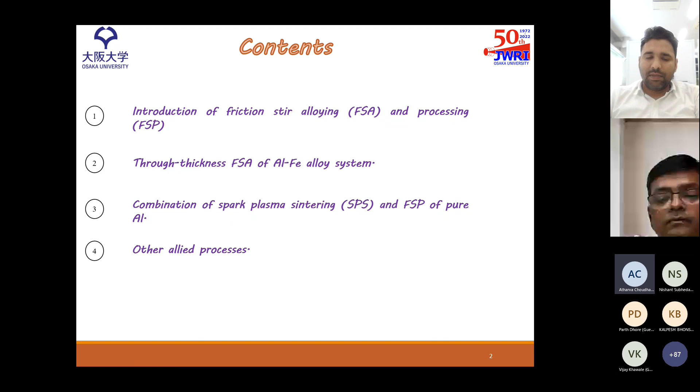Lastly, I will discuss some other allied processes related to friction stir welding. Many processes have emerged recently based on its principles. Friction stir welding is the initial one, mainly used for butt welding and lap configurations, as well as underwater welding and spot welding. It is primarily used for aluminum alloys, with applications in the aircraft industry, bullet trains, and high-speed vehicles.

Another variant is alloying, where local modification is carried out by reinforcing other elements into the base metal. One such variant is processing, where instead of another metal, reinforcements like silicon carbide or graphite are added to the base material to enhance surface properties.

The most important recent development is additive manufacturing, where layer-by-layer deposition takes place to construct a product in a 3D model. Other variants include cladding, where another metal is joined over the base metal to provide resistance from corrosion or wear, and channeling, where a channel is created through solid state welding; extrusion and brazing are also similar processes.

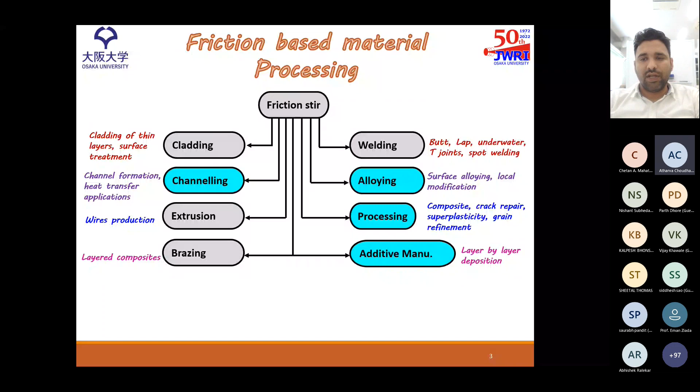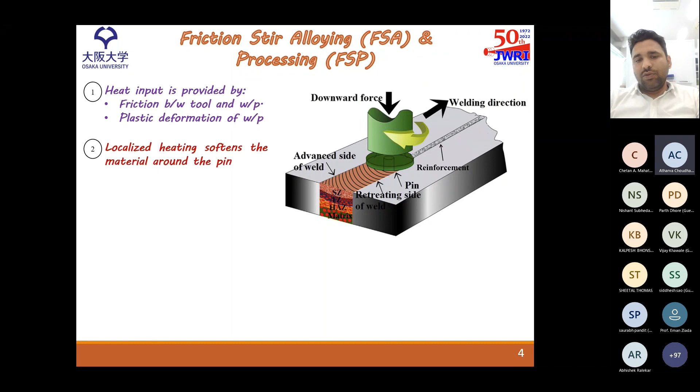Coming to my first topic, the introduction: what is friction stir alloying and processing? This is a solid state process, one of the important variants of friction stir welding. It consists of a base material in which we create a groove, and the reinforcement is filled in this groove. There is a non-consumable tool which has two types of motion, linear and rotatory, and the tool moves in close contact with the surface.

The frictional heat is generated by the frictional interaction between the tool shoulder and the base material, as well as the plastic deformation carried out in the solid state. This is responsible for the heat generation.

And in this way, the localized heating is generated, which softens the material around the tool pin, and this rotatory motion makes the material flow. And in this way, this reinforcement material, whichever is in the groove, gets filled and mixes with the base material. And in this way, the alloy or composite based on the reinforcement is produced in the solid state.

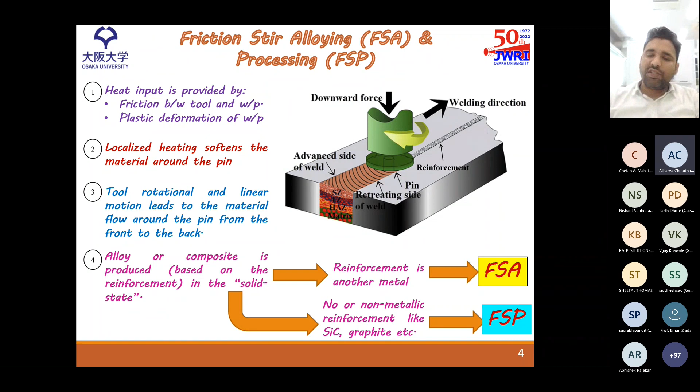Now, based on the reinforcement, if the reinforcement is another metal, suppose the base metal is aluminum and the reinforcement is copper or iron or magnesium, anything, then we can say this process is alloying, that is friction stir alloying. If there is another reinforcement which is non-metallic, like silicon carbide, graphite, tungsten boride or tungsten carbide, etc., then the process is usually termed friction stir processing. However, the basic principle of both processes is the same.

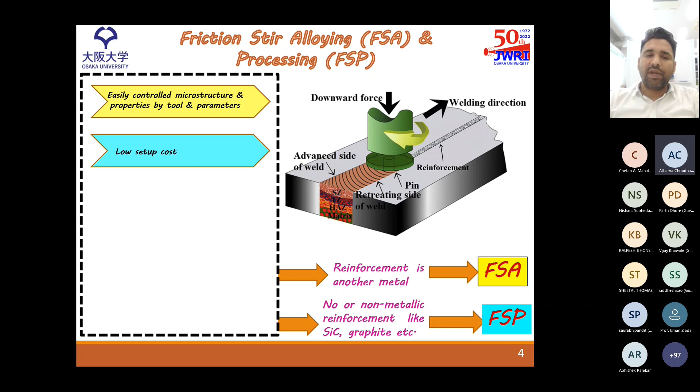Now, why are we conducting this processing in a solid state when we can do it in casting? Because of certain advantages of this process: the microstructure can be easily controlled, and whatever we are producing, we are producing it in a solid state, so the material properties remain intact. The overall material setup cost is very low. It can be done on a milling machine, and the particle impregnation depth can be easily controlled by the tool pin.

This is a tool and it has a pin which is inserted into the base material. So by controlling the pin depth or the pin height, we can easily control the depth of particle impregnation. The process is green and energy efficient as it does not involve any slurry, shielding gases, fumes, etc. And this is a one-step solid-state processing for microstructural refinement.

The grains obtained after friction stir processing are very fine. And densification is good - there are no defects like porosity or gas shrinkage or anything. And the particle dispersion is mostly homogeneous across the thickness, across the shoulder or the processing zone.

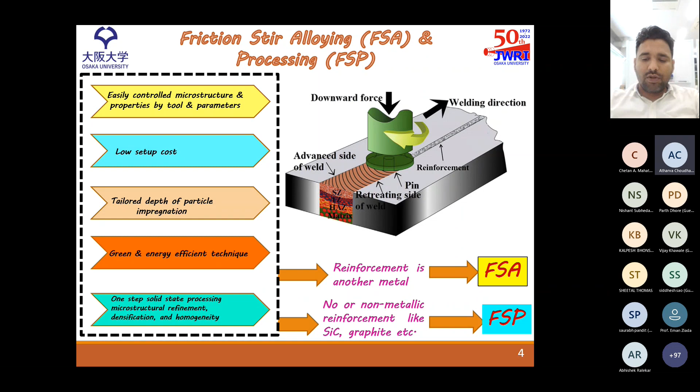Now coming to the first project that I'm working on here, that is the through-thickness inhomogeneity in the friction stir alloy Al-Fe alloy system. Now after thinking of the title, the question arises why Al-Fe alloy system? Because in the Al-Fe alloy system, when fabricated by friction stir alloying, there is generation of plastic strain and exothermic reactions. These exothermic reactions and plastic strain lead to the formation of Al13Fe4 intermetallic layers. This intermetallic layer, when reinforced in the aluminum, increases the tensile strength, improves the hardness, as well as improves the corrosion resistance.

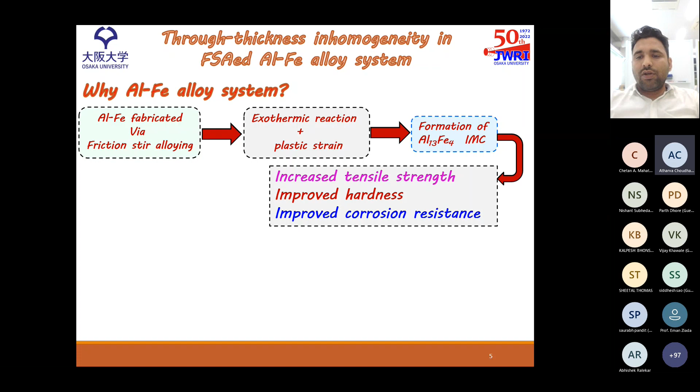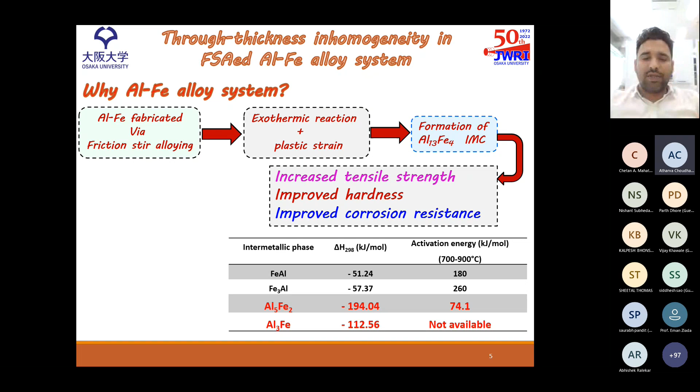These are the aluminum-rich intermetallic compounds, and they enhance the properties. They are hard, brittle substances which are impregnating into the aluminum surface. So it is increasing the hardness, tensile strength, etc.

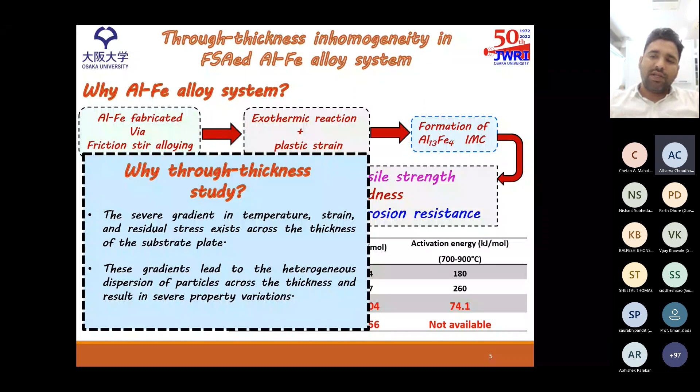Now the next question: why through thickness, and what does it mean? Through thickness means that when in friction stir welding we are doing the shoulder, the heat generation is not homogeneous. On the top of the surface where the shoulder is interacting with the base plate, the maximum heat is generated. And when we move across the thickness, the heat generation changes, the temperature varies, and similarly the strain and the residual stresses vary.

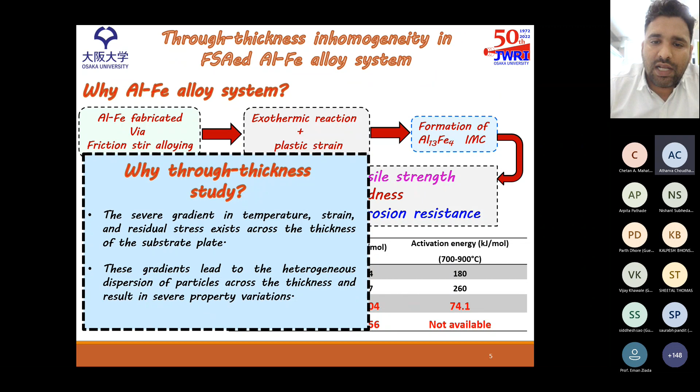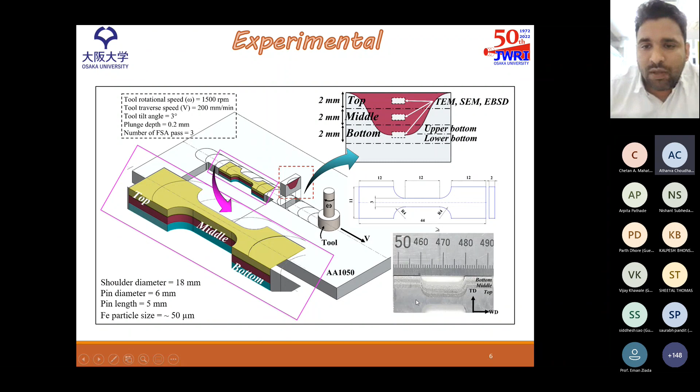Now coming to the particle dispersion microstructure, this is the cross-section micrograph. This black part can be identified as the iron-rich zone, and this is a fully etched micrograph. So a very well stir zone and other zones can be classified.

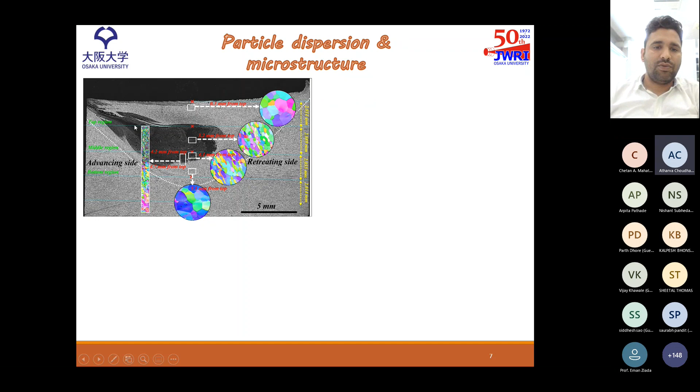Now the two interesting features observed here are that this is the advancing side and this is the retreating side. The particles are mostly dispersed on the advancing side instead of the retreating side. This happens only in the top layer, because in the top layer a shear zone is formed around the pin. This shear zone is very dominant in the top section, which throws out the particles from the stir zone to the advancing side.

Now why only advancing side, not the retreating side? Because the material movement is from the retreating side to the advancing side at the tool rear, which causes the dominant dispersion on the advancing side as compared to the retreating side. Whereas in the middle and bottom layer, this shear zone is much less dominant, and it does not significantly affect the particle dispersion, so the particles remain mostly in the stir zone only.

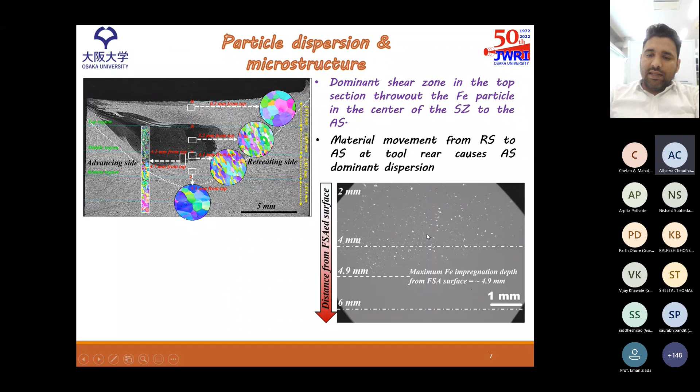In the bottom region, as I said, there's a bimodal distribution. We can see that in the upper bottom section some particles can be seen, whereas in the lower bottom section there is no particle. So this means this is the iron deficient region and this is the iron rich region.

Interestingly, we have observed that the particles can be impregnated up to 4.9 millimeter depth, the last particle being impregnated at 4.9 millimeter. Luckily we also have a pin length of around 5 millimeters. So we can see the first benefit, that the particle impregnation depth can be controlled by the pin height, which is achieved here, and the particles are impregnated only up to the pin height. There's a homogeneous dispersion in the middle and a bimodal distribution in the bottom section, as explained earlier.

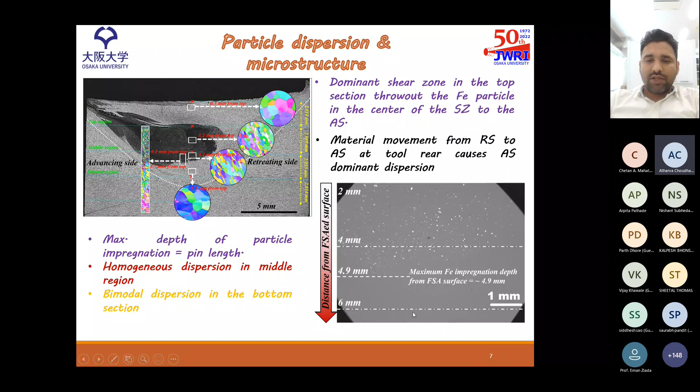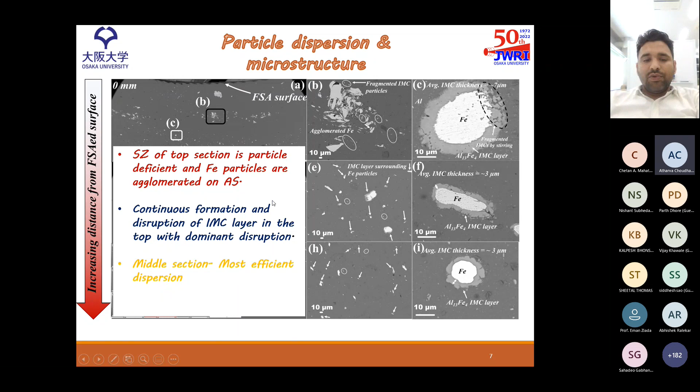There is continuous disruption and formation because in the top section, the temperature is also higher for diffusion of iron atoms into aluminum, so the reaction is also higher. So the chances of formation of IMC are more prevalent in the top section, but simultaneously the stirring action is also more dominant, causing disruption of this layer. The middle section shows the most efficient dispersion we have observed.

Coming to high magnification transmission electron microscopy, we obtained a sample from the stir zone. As already said, the top section's stir zone is a particle deficient region, so there's no iron for diffusion or reaction with aluminum. That's why we observed only very few particles of the IMC layer here, a well-defined elliptical shaped IMC Al13Fe4 particle. On SAD indexing we confirmed this particle as the IMC particle, and the EDS analysis further confirms it.

The middle section of the Al-Fe alloy shows very interesting features. First, there's a homogeneous dispersion of particles as seen in the EDS mapping. Also, two types of IMC particles can be observed: the first is the elliptical shaped particle, and the other is the irregular shaped particle. Now why do we observe these two types of morphology when the reaction is one?

By TEM analysis we identified that the elliptical shaped particles are precipitated out of the matrix, whereas the irregular shaped ones are fragmented particles from the layers formed around the Fe particle. That's why these two types of morphologies are visualized.

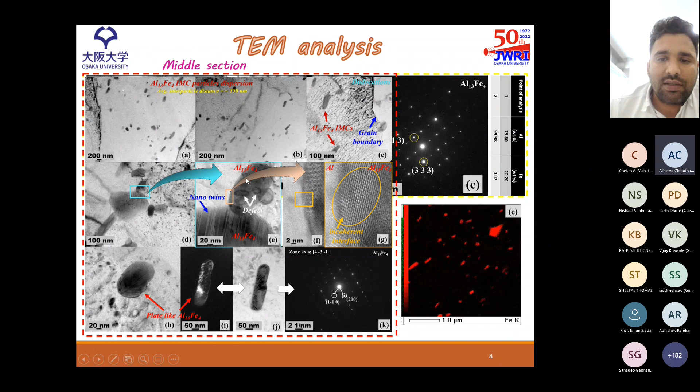Another interesting feature is the incoherent interface, as can be seen here. This incoherent interface further restricts dislocation movement as it has higher energy - these are high energy interfaces. Based on these features, we can say that strengthening is provided in multiple ways by the IMC particles in the aluminum matrix.

So here I have discussed the uniform dispersion of IMC particles, the incoherent interface, the nano twins which are formed, and the defect structures on IMC particles. We observed these small shapes with hole morphology, which appear to be defects. But when we did high magnification microscope analysis, we can say these are not holes but instead cavities - when there is localized melting of aluminum, this aluminum deposits in these cavities and then solidifies. So these are aluminum rich zones instead of hole defects in the IMC particles.

Now, as I said, these small size IMC particles contribute to grain boundary pinning, as can be seen here and also here. The grain boundary pinning and dislocation blockade can also be visualized here. The PSN mechanism by unreacted Fe particles is also visualized in some of the cases.

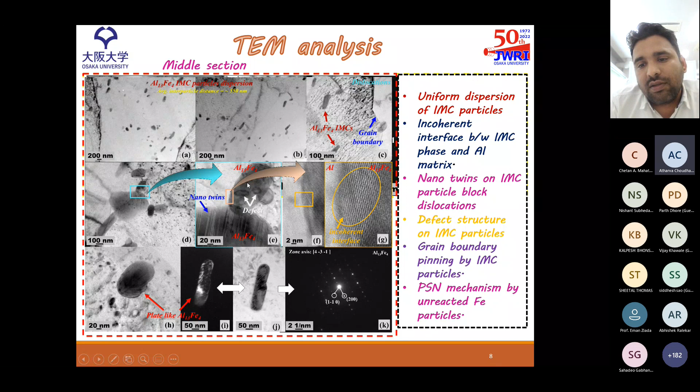Now, from the bottom section of the Al-Fe alloy, the heat available for diffusion of iron atoms and aluminum is very significantly low, and there are no such reactions. However, there is reaction, but it is much less dominant compared to the top and middle sections. So we found unreacted Fe particles here, and this is confirmed - these particles are SAD confirmed unreacted Fe particles.

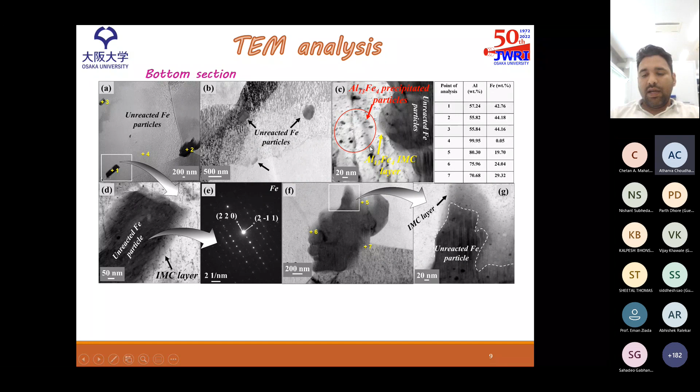However, we have observed a layer also - this is a diffusion layer or IMC layer formed around the Fe particles. But this layer has such high thickness because in the bottom part the stirring action is also very less, so it's not broken or fragmented and remains intact with the particle. Here we can see some IMC particles which are precipitated and formed in the matrix, and here also two types of morphology are obtained: the irregular one and the ellipse-shaped morphology.

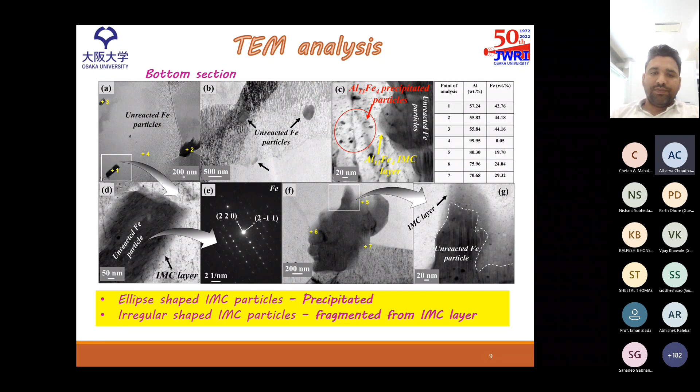Now coming to the microstructural evolution, this is the microstructure of the base material. We can see elongated grains, which is a typical rolled structure. And this is the microstructure of the top region.

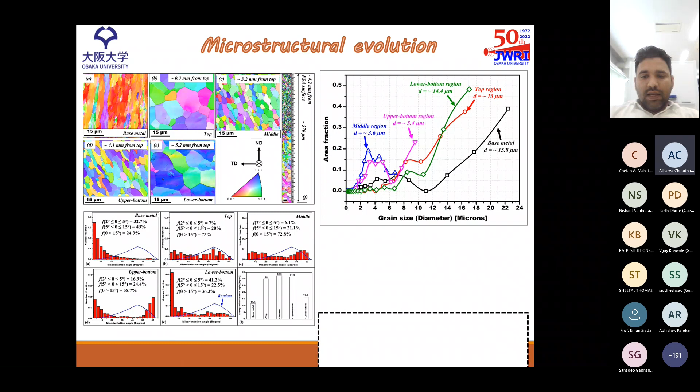Coming to the tensile properties, we can see that the middle section has the highest tensile strength as compared to the bottom and the top one. The bottom section has the highest elongation.

This is because of the bimodal distribution; the fine grain size provides the strength, whereas the large grain size helps in dislocation accumulation and thereby provides higher elongation compared to the other one. Also, in the stir zone, since the particle dispersion is homogeneous as we have seen, higher and homogeneous hardness is obtained.

Whereas in the advancing side, the top section, the particles are dominant on the advancing side. That's why the higher hardness on the advancing side is obtained.

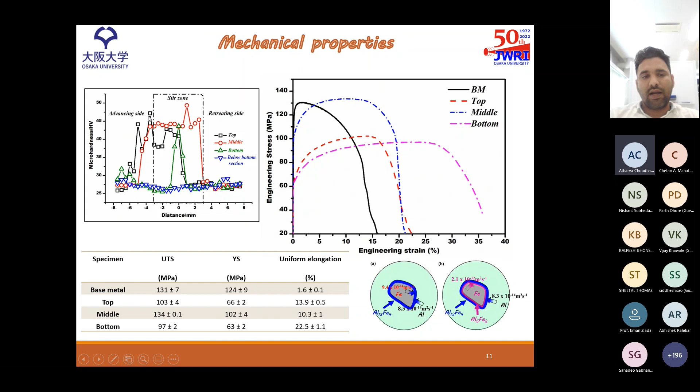Now coming to the reaction. This is an Fe particle and this is aluminum. So what happens, due to the diffusion of iron and aluminum, an Al13Fe4 layer is formed here.

Since these are the rates of diffusion of iron and aluminum in the Al13Fe4 IMC layer, there will be a unidirectional diffusion of iron atoms into this layer, and the content of Fe keeps on increasing. So this provides the foundation for the reaction of Al5Fe2.

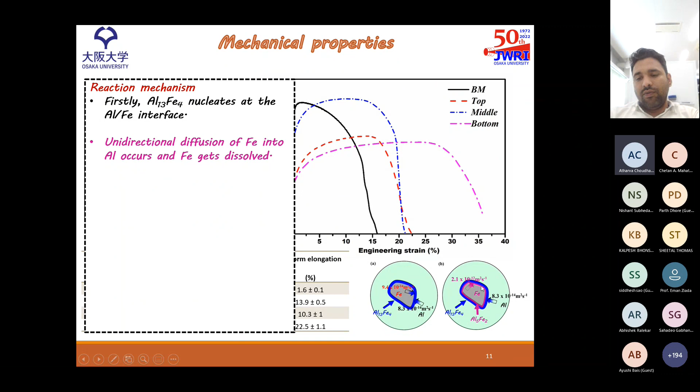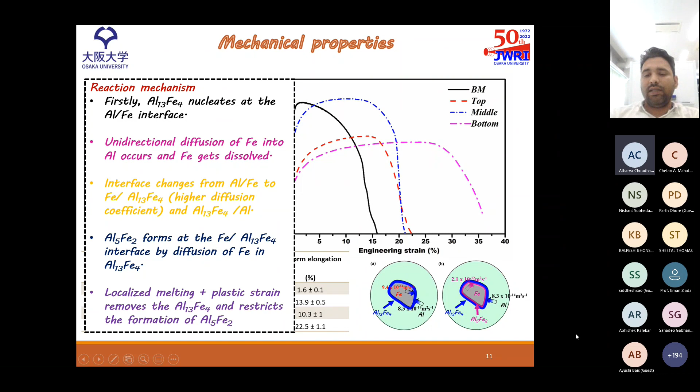However, in our case, as soon as this layer is formed, Al13Fe4, by the stirring action, it is removed from the Fe particle, and that's why there is no foundation for the formation of Al5Fe2. Thus, we have avoided this brittle intermetallic particle from our structure.

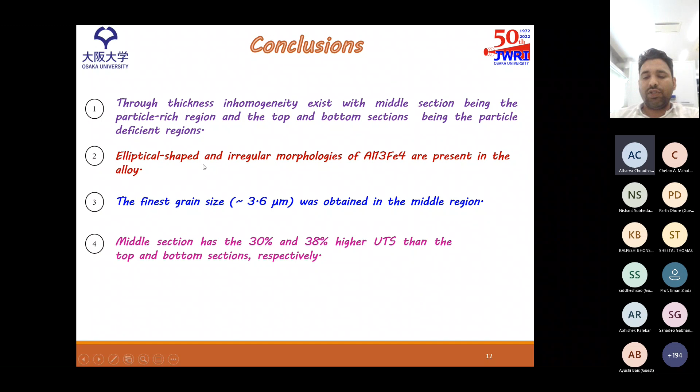Coming to the conclusion of this part of the presentation, we have obtained through-thickness inhomogeneity in the middle section, and the middle section is the best section, having the highest strength. Two types of morphologies are found, elliptical shaped and irregular morphology, and the finest grain size was obtained in the middle region.

Now coming to the second part of the presentation, this is my second project, where we have combined spark plasma sintering and friction stir processing. Why are we combining these two advanced manufacturing strategies?

The reason is that spark plasma sintering, when the powdered billet is formed with SPS, has some porosity. However, it is 95% dense, but still there are 5 to 10% chances of porosity. This porosity reduces the density of the component and the hardness as well as the tensile strength.

Another problem with spark plasma sintering is that the grain size is very high because of the long exposure to higher temperature. So the grain size is very high, and due to this higher grain size, the tensile strength is further reduced.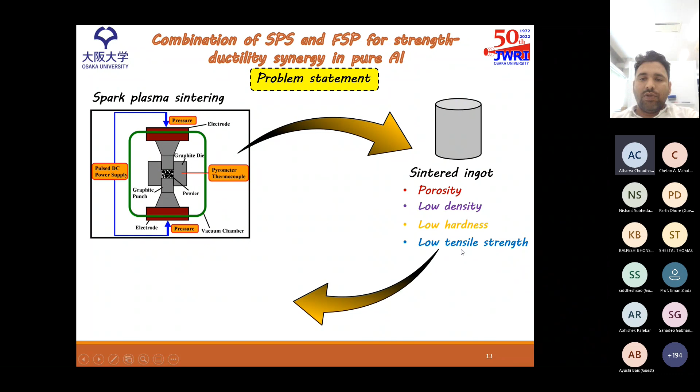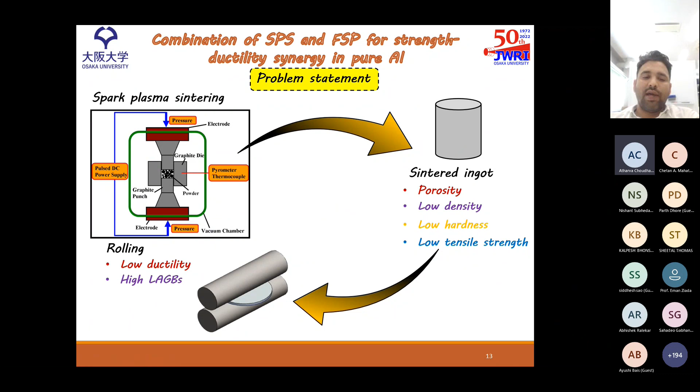So the most prevalent solution is to subject these powder metallurgy components to some kind of severe plastic deformation process like rolling or extrusion. With rolling, the density becomes 100%, but again the ductility is reduced, and the microstructure consists of a high fraction of low angle grain boundaries, so the ductility is severely compromised.

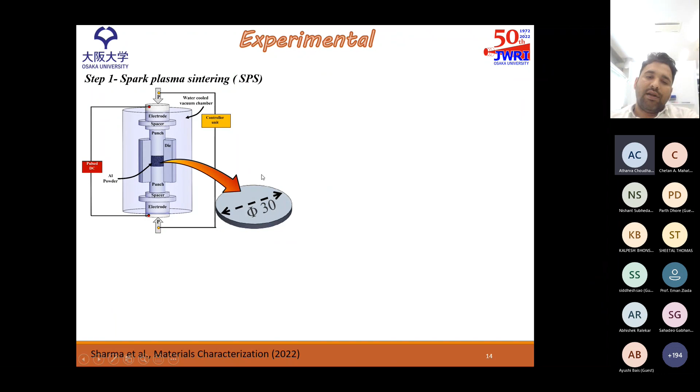So we came up with a solution to combine spark plasma sintering with friction stir processing for it. In the first step we have done the spark plasma sintering, and we obtained a powder billet with a 30 millimeter diameter and 5 millimeter thickness.

And these are the process parameters we have used. The most important parameters are like the temperature, which is around 550 degrees centigrade, and sintering time, which is around 20 minutes. And we have produced this billet.

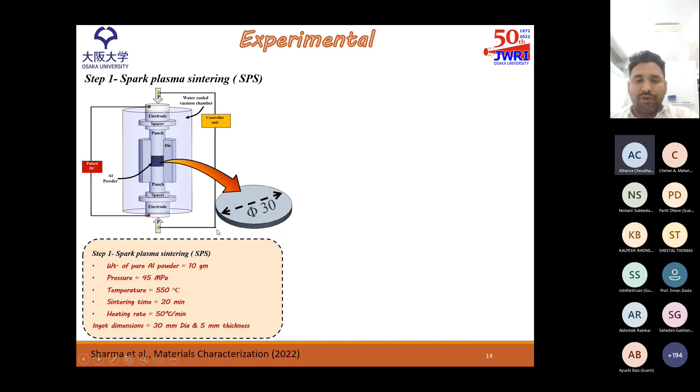In the second step, we have done the cross rolling. What is cross rolling? It means the specimen is rotated by 90 degrees after each pass.

In the first pass we obtained a billet of dimension around 32 millimeter on the minor axis and 55 millimeter on the major axis. In the second pass it is rotated and again passed through the rolls, and we obtained around 40 millimeter diameter and 2.5 millimeter thickness. So it is a 25% reduction in each pass.

Now the primary reason for doing the cross rolling is because we have to fix it on an FSP/FSW setup, and fixing is difficult with the machine available here. So that's why we transformed it into a circular geometry for the fixing purpose.

In the third step, we have done the friction stir processing. This pure aluminum billet, formed by spark plasma sintering, was processed with two passes, and we obtained a tensile specimen such that the whole processing zone comes under the gauge length.

We used process parameters like 1000 RPM and a traverse speed of 50 millimeter per minute. We want to use this technique for graphene and carbon nanotube composites.

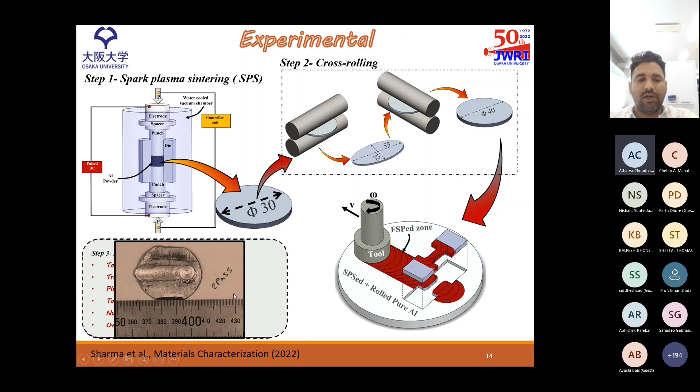And we have done it with 100% overlap. This is the final product that we have obtained. This is a billet, and we have done a nice friction stir processing over it with a very fine dimensional tolerance. So in this study, I will be abbreviating the comparison.

We have compared the specimen with annealing, because annealing is the most prominent heat treatment given to restore the microstructure or ductility loss caused by the rolling. So we have annealed the specimen to compare the effect of friction stir processing with that of annealing also.

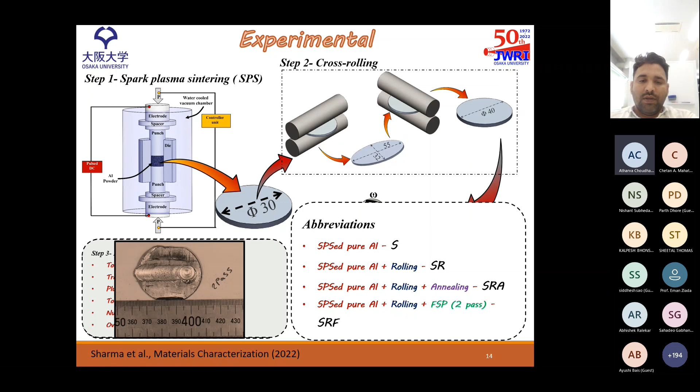Now coming to the microstructural evaluation, we can see this is the spark plasma sintered billet. The grains are equiaxed and recrystallized. A very fine grain structure is obtained here, around 17 micron.

On rolling, the microstructure transforms and low angle grain boundaries are formed. This is a typical elongated grain structure, which we can see here, and the grain size reduced to around 7 micron because of the subgrain structure formation.

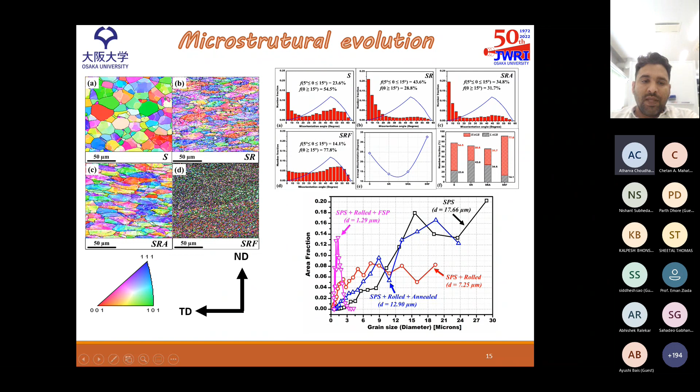On annealing, a typical recovered structure can be seen where the low angle grain boundary fraction is reduced. However, the grain size is almost the same or increased, around 13 micron, because of the exposure to high heat.

On FSP, a fine equiaxed grain structure is formed, and this structure is completely different from all the other three because of its very fine structure. The most interesting thing is that it has more than 77% high angle grain boundaries, meaning these fine structures are not subgrains.

Instead, they are grains. So we can confirm with certainty that a mechanism like discontinuous dynamic recrystallization is responsible for the formation of these fine grains.

Another proof which supports this statement of dynamic recrystallization is that it rarely happens in aluminium. Aluminium mostly shows recovery and not dynamic recrystallization - recovery and CDRX are the most prominent recrystallization mechanisms in aluminium.

But here we can see that 25% of the grains are of nano size. This nano size, along with this high fraction of high angle grain boundaries, is difficult to form by continuous dynamic recrystallization. So we can definitely say that discontinuous dynamic recrystallization occurred here.

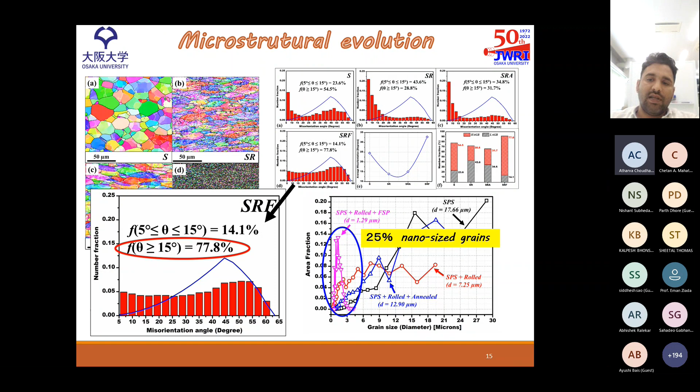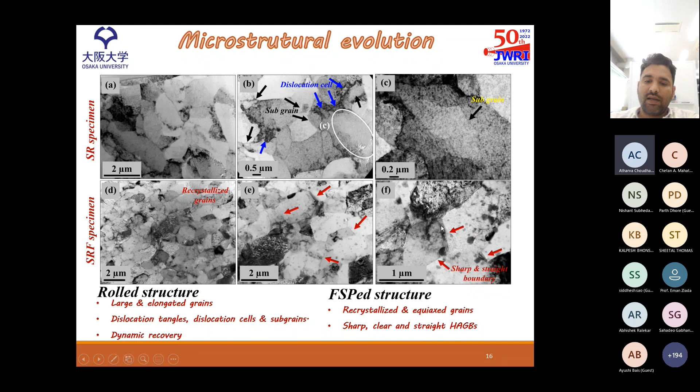Coming to the TEM microscope, we have further confirmed the specimen types. ABC are for the rolled specimen and DEF are for the friction stir processed specimen. In the rolled specimen, the grains are very large and show various features like subgrain formation, dislocation cells, and tangles, indicating a typical recovered structure through subgrain formation. In the FSP structure, a recrystallized microstructure with equiaxed grains can be visualized, and most boundaries are high angle grain boundaries with sharp and clear features.

The interesting thing is that in the rolled specimen, we observed continuous dynamic recrystallization. The dislocations are absorbed at the geometrically necessary boundaries, with random incidental dislocation boundaries trapped under the geometrically necessary boundaries. So continuous dynamic recrystallization occurred in the rolled specimen, whereas discontinuous dynamic recrystallization occurred in the FSP structure.

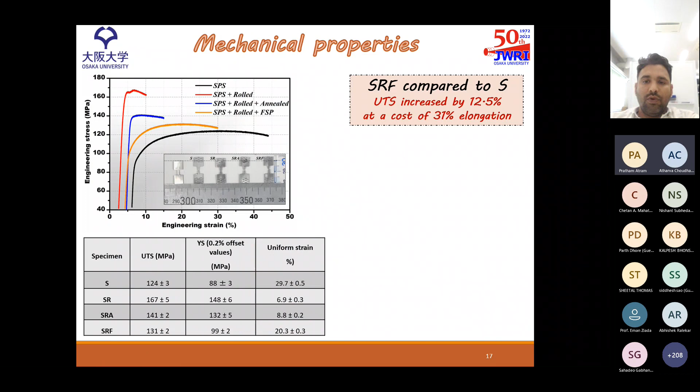Coming to the mechanical properties, we observed that the rolled specimen shows very less ductility with higher strength, whereas the spark plasma sintered specimen, because of its large grain size, shows higher elongation but very low strength. So an intermediate property is described in the SRF specimen, with sufficient ductility as well as higher strength. The minimum yield strength and maximum elongation is obtained by spark plasma sintering, but with rolling we get the maximum yield strength and minimum elongation. So a balanced strength and ductility combination is achieved in SRF.

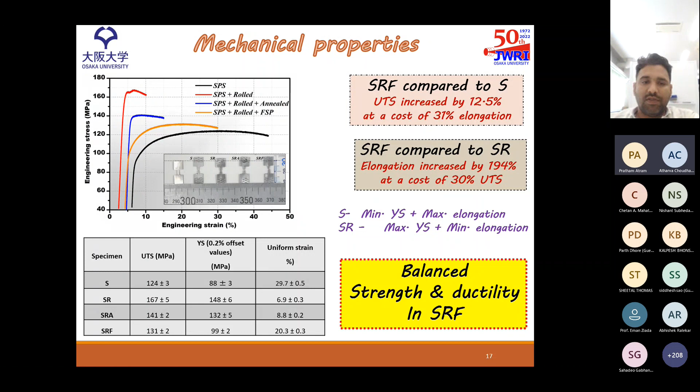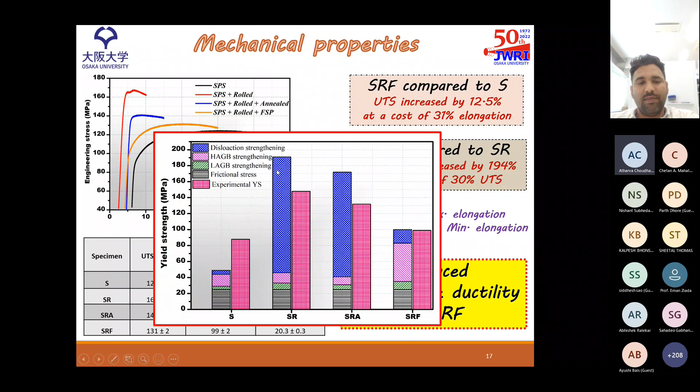We have calculated the theoretical strength, and we can see that dislocation strengthening is the primary strengthening mechanism in the rolled specimen, whereas in the SPS and FSPed specimens, grain boundary strengthening is the prominent strengthening mechanism. We have compared our results with existing results, and we can say a better strength-ductility combination is achieved here.

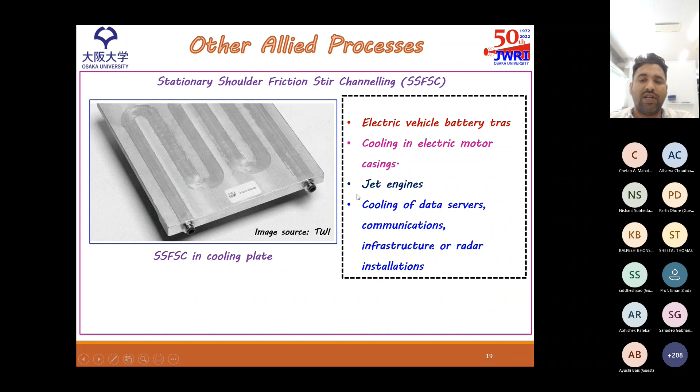Okay, so with this slide, I would like to conclude my presentation. Thank you.